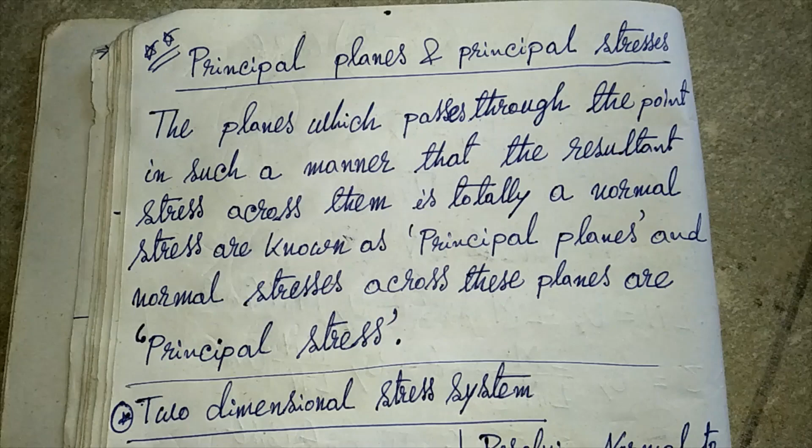In the last video we learned about pure shearing stress, where two mutual stresses are perpendicular to each other.

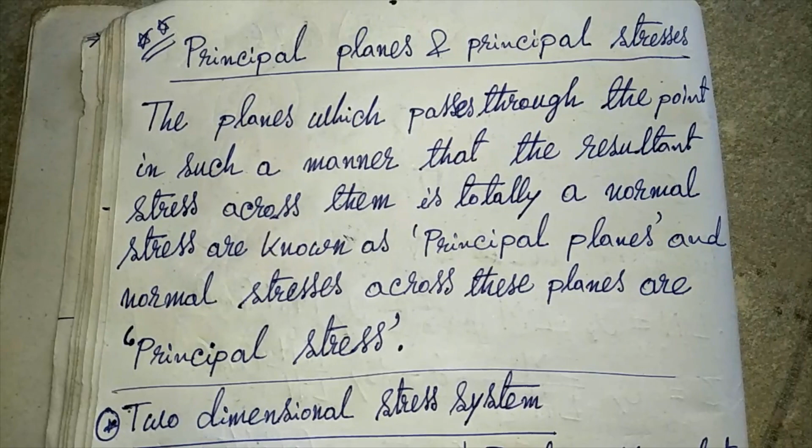In this lecture we will learn about principal planes and principal stresses, and we will find the expressions for major principal stress, minor principal stress, and shear stress.

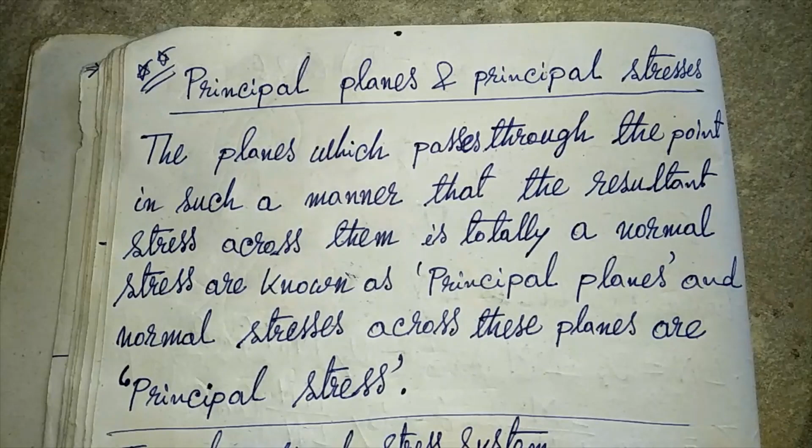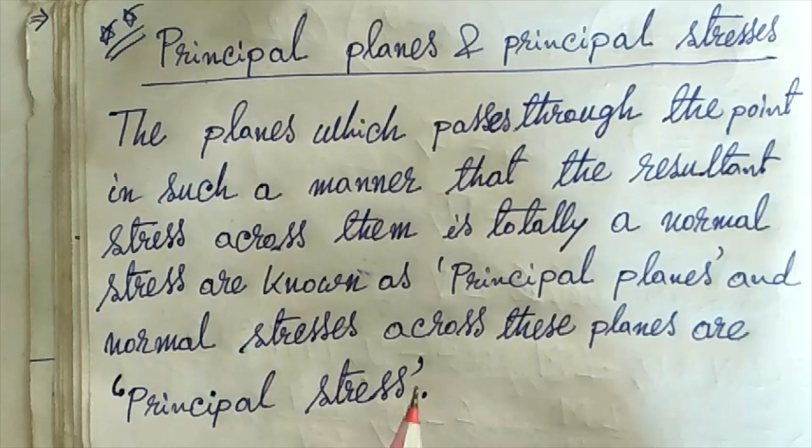Let's start with principal planes and principal stresses. The planes which pass through a point in such a manner that the resultant stress across them is totally a normal stress are known as the principal planes, and the normal stresses across these planes are called the principal stresses.

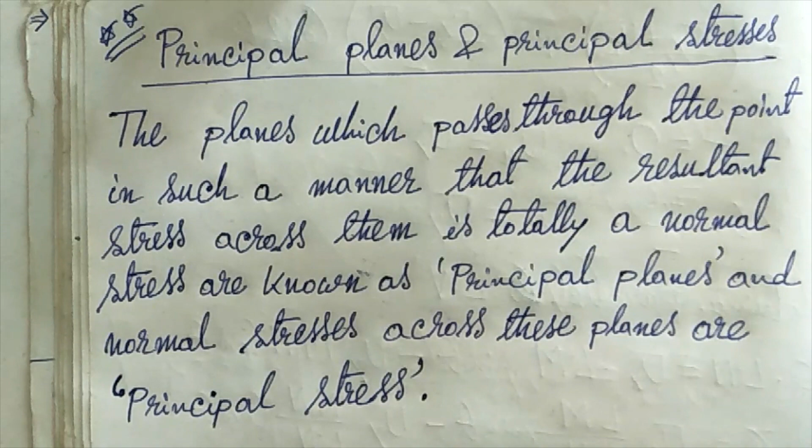Let's see how to derive the principal stress equations. Let's think of a situation where a two-dimensional stress system is involved, meaning both direct stress and shear stress are present.

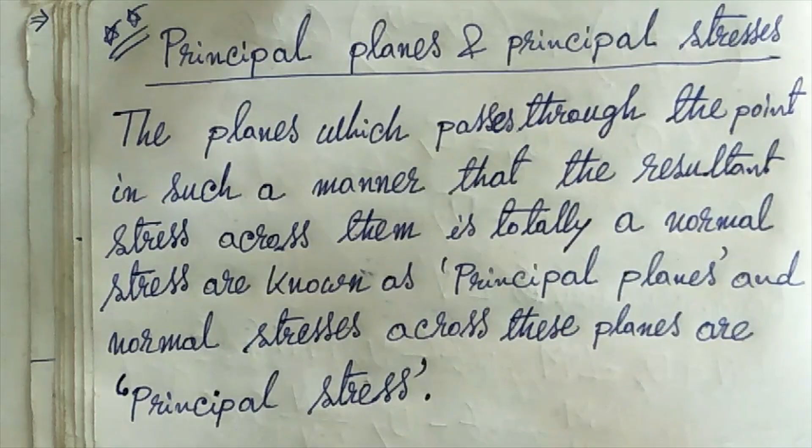Here LMN is a rectangular block, but we are cutting this rectangular block into a triangular section. The plane LN is inclined at an angle theta with the LM side.

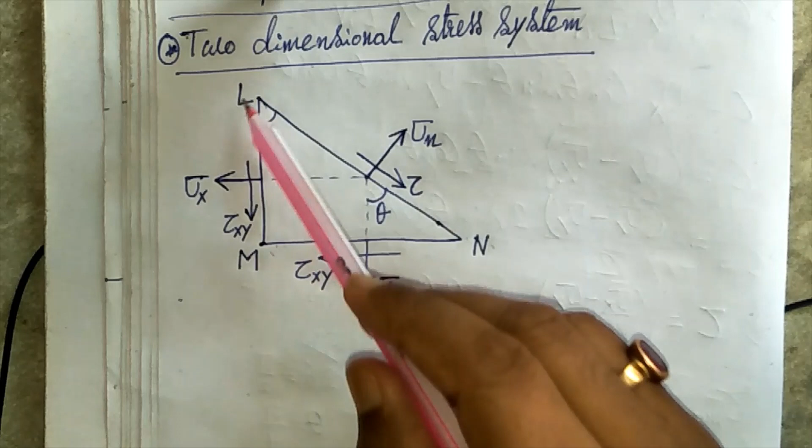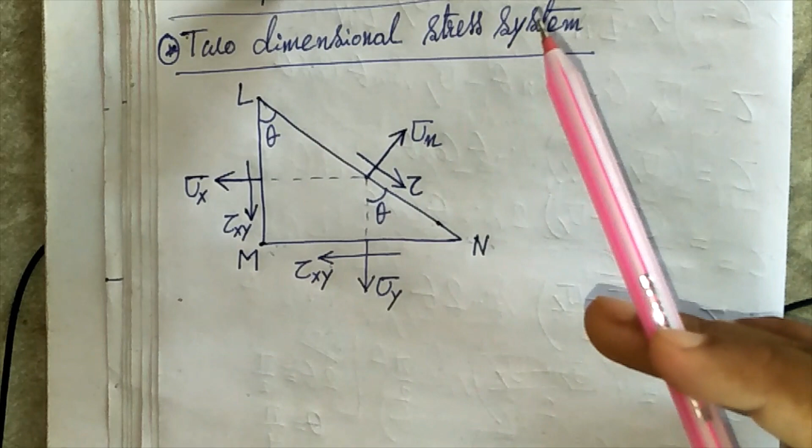The shear stresses acting on LM and MN sides are tau xy. The direct stresses acting on LM and MN sides are sigma x and sigma y. The normal stress along LN is sigma n, and the shear stress along LN is tau. So this is a combination of direct normal stress and shear stress both.

Let's see the expressions for this case. As before, first we resolve all forces which are normal to the LN plane.

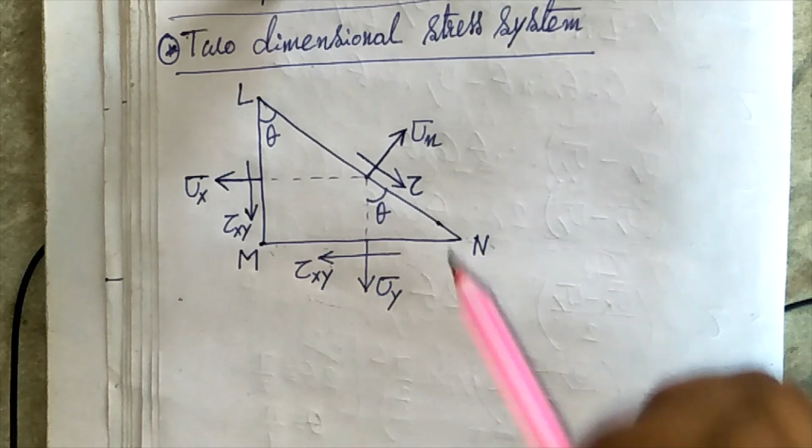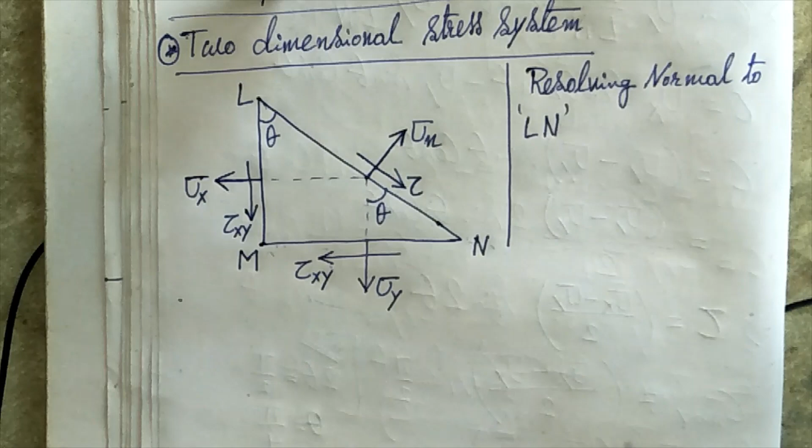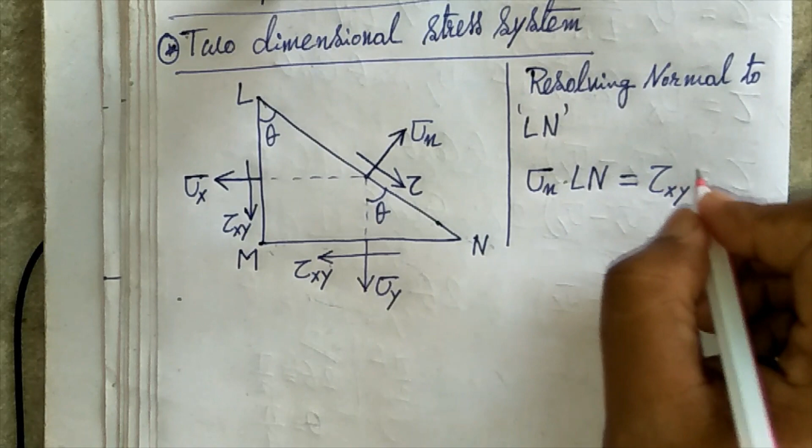Resolving normal to LN: sigma n into LN (with height 1) equals tau xy into LM sin theta, plus sigma x into LM cos theta, plus tau xy into MN cos theta, plus sigma y into MN sin theta.

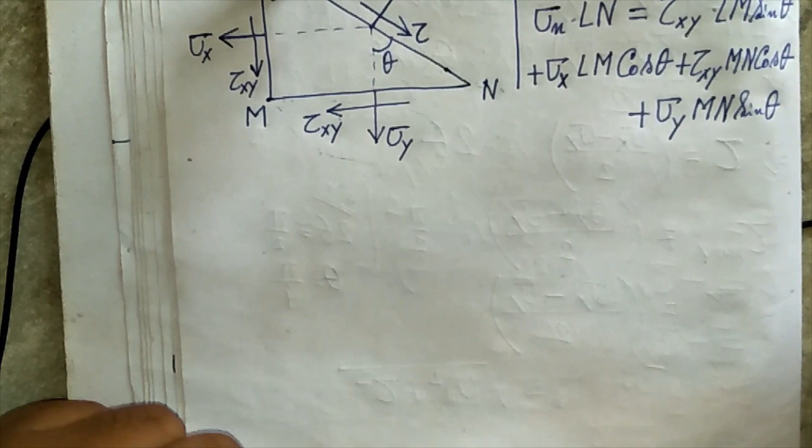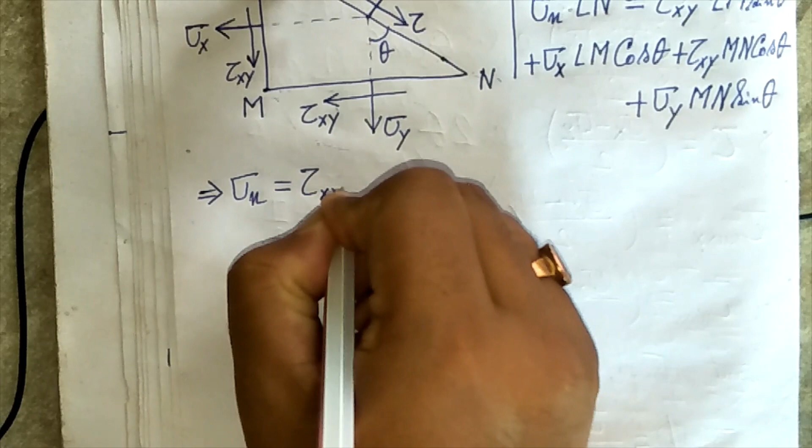This comes from the geometry of the figure, as already described in previous cases. So the value of sigma n equals tau xy times (LM/LN) sin theta plus sigma x times (LM/LN) cos theta plus tau xy times (MN/LN) cos theta plus sigma y times (MN/LN) sin theta.

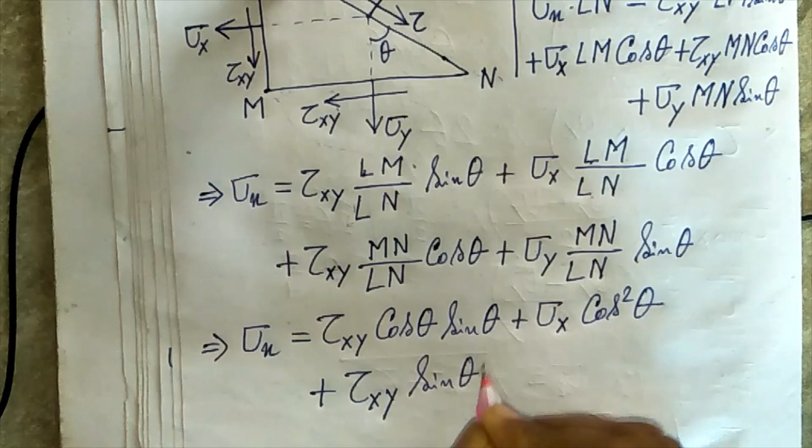Now for the values of LM/LN and MN/LN: from the trigonometry of the figure, LM/LN is cos theta, so tau xy cos theta into sin theta, plus sigma x with cos theta into cos theta giving cos square theta. Similarly, tau xy MN/LN is sin theta, so tau xy sin theta into cos theta, plus sigma y with MN/LN as sin theta into sin theta giving sin square theta.

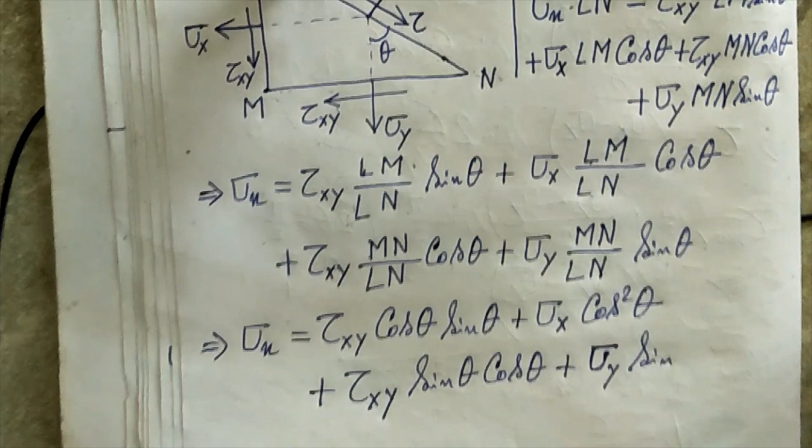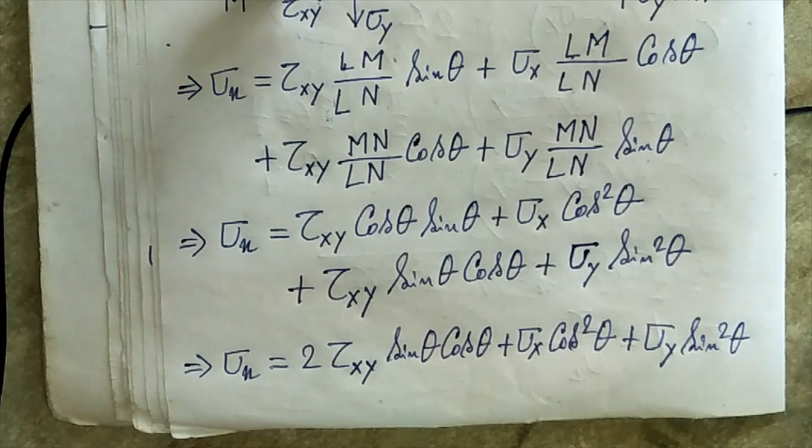So the value of sigma n equals 2 tau xy sin theta cos theta plus sigma x cos square theta plus sigma y sin square theta.

By simplifying the equation of sigma n, we get: tau xy sin 2theta plus (sigma x plus sigma y)/2 plus (sigma x minus sigma y)/2 cos 2theta. This is the expression for sigma n.

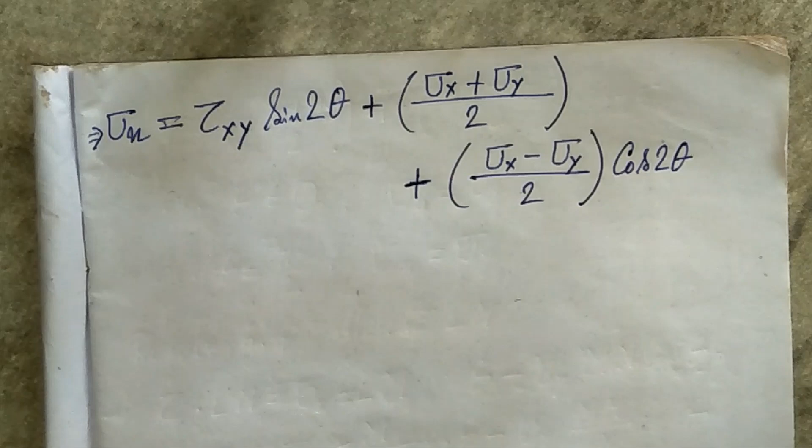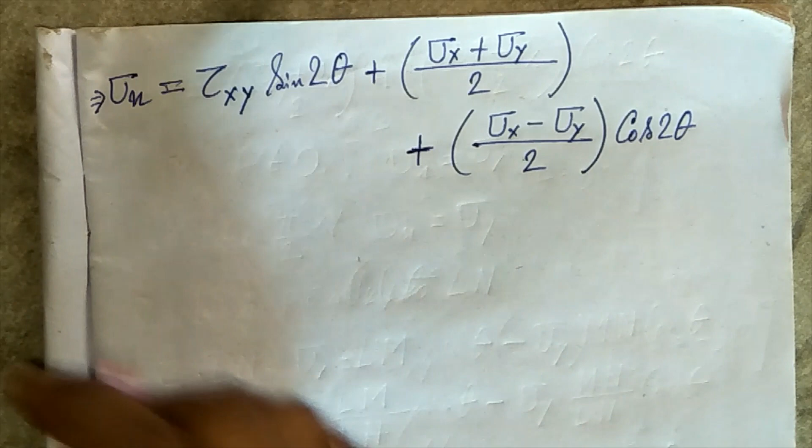Now let's resolve the forces parallel to the LN plane. The parallel stress is the shear stress, so tau is the shear stress along LN. Tau into LN equals tau xy into MN sin theta...

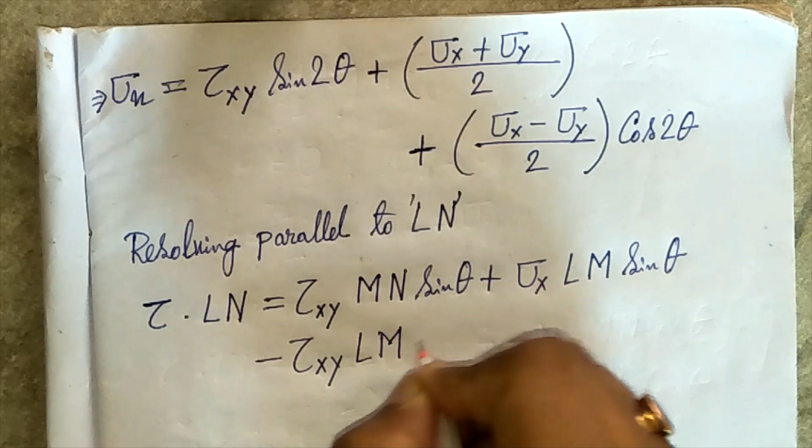...plus sigma x into LM sin theta, minus tau xy into LM cos theta, minus sigma y into MN cos theta.

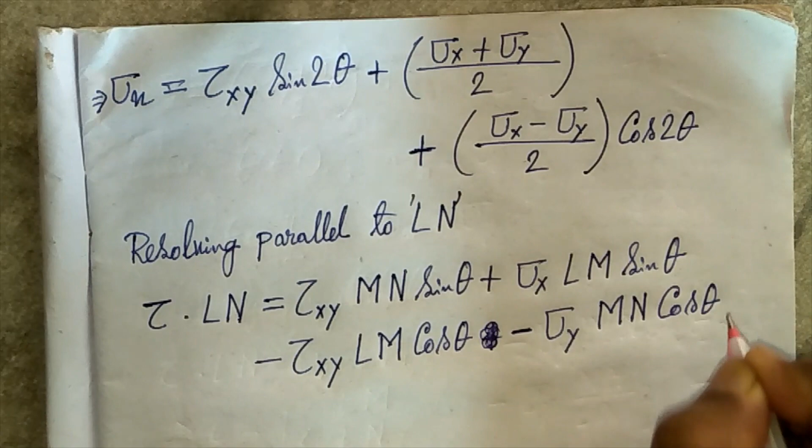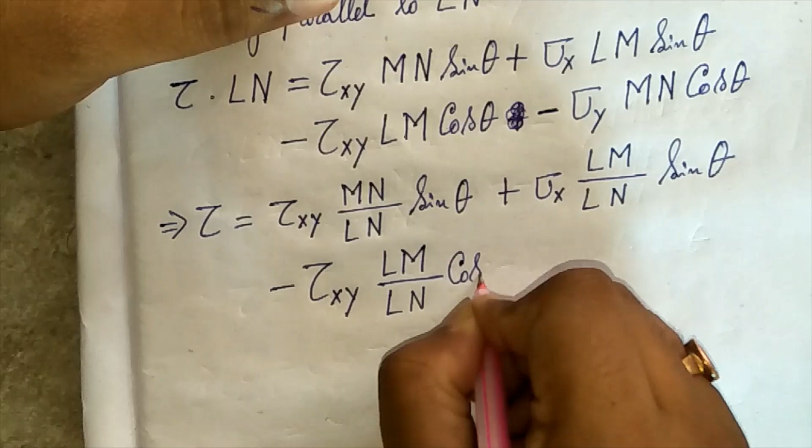So we can write tau equals tau xy times (MN/LN) sin theta plus sigma x times (LM/LN) sin theta minus tau xy times (LM/LN) cos theta minus sigma y times (MN/LN) cos theta. So this is the expression.

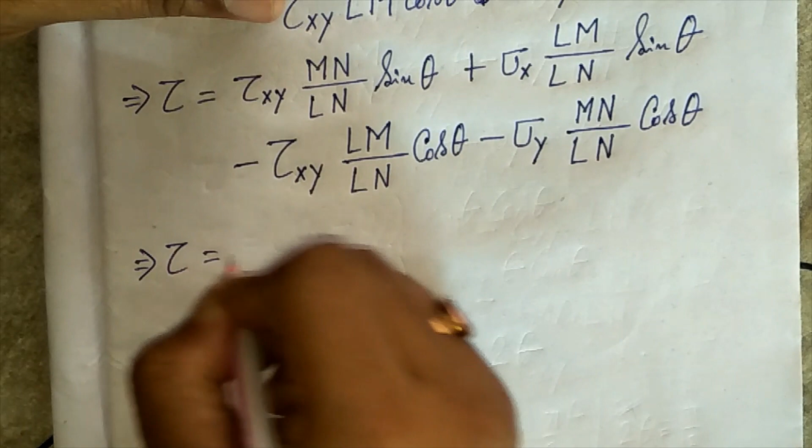So from the geometry of the block, we can write tau equals to tau xy. This mn by ln is sin theta, so we can write tau xy sin square theta plus this lm by ln is cos theta, so we can write sigma x into cos theta sin theta, minus again this lm by ln is cos theta, so tau xy cos square theta, minus this mn by ln is sin theta, so sigma y sin theta cos theta.

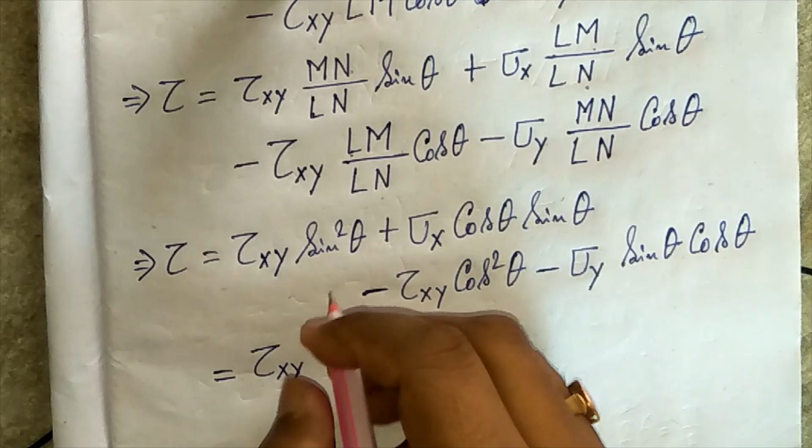So by simplifying, we can write tau xy sin square theta minus cos square theta, plus sigma x minus sigma y by 2 into sin 2 theta, or we can write

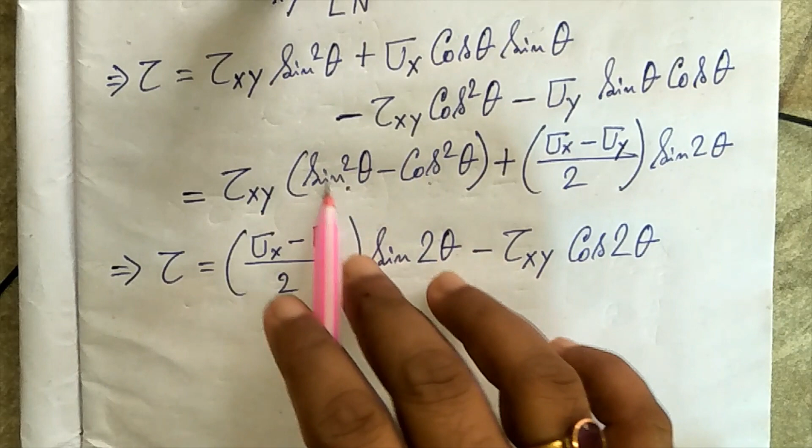tau equals to sigma x minus sigma y by 2 sin 2 theta, minus tau xy cos 2 theta. This is sin square theta minus cos square theta, but the formula is cos square theta minus sin square theta, so that becomes minus cos 2 theta. So simply we can write minus tau xy cos 2 theta. So this is the expression of shear stress tau.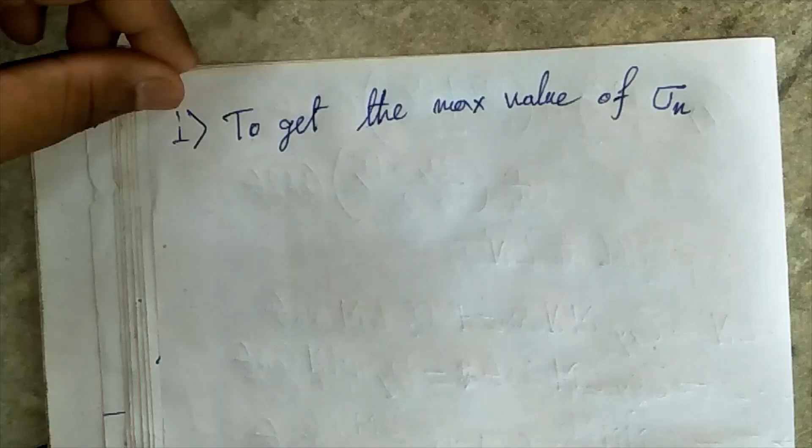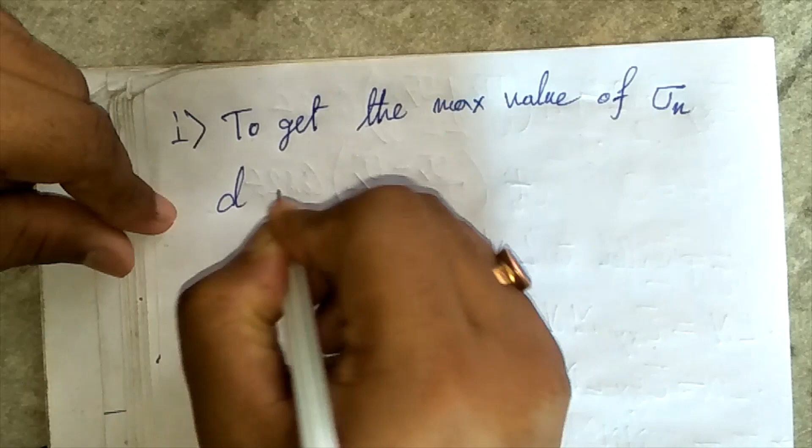Now in order to find out the maximum and minimum values of sigma n and tau, let's see. So first of all, to get the maximum value of sigma n, we have to differentiate the sigma n expression with respect to theta. So d sigma n by d theta, we are going to differentiate the expression of sigma n with respect to theta.

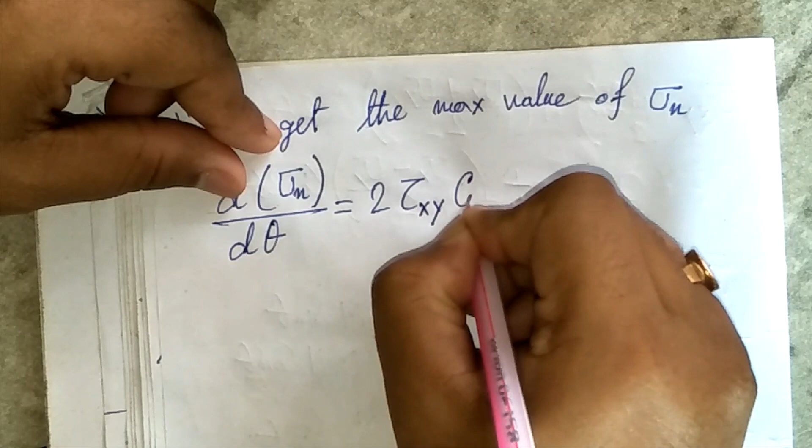Let's see what we get. That is 2 tau xy cos 2 theta minus 2 sigma x minus sigma y, this is sigma y, by 2 into sin 2 theta.

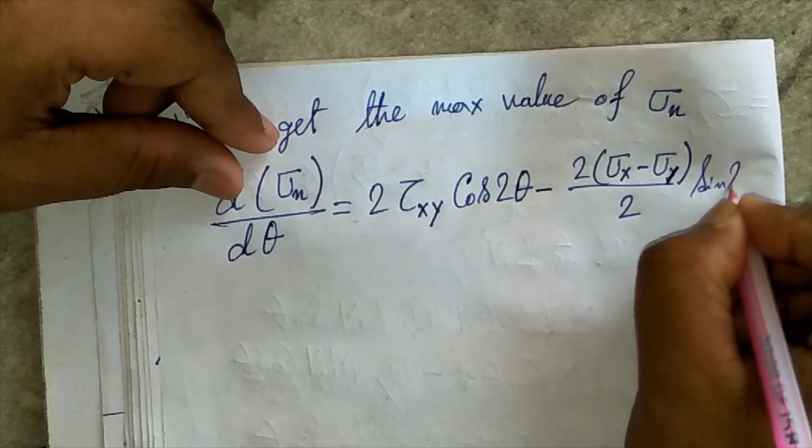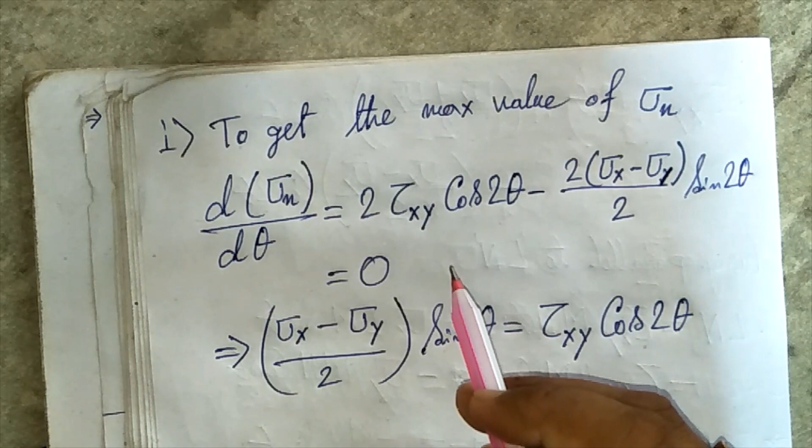So by equating this expression to 0, let's see what we get. We get sigma x minus sigma y by 2 into sin 2 theta is equals to tau xy cos 2 theta. So to find out the maximum value of sigma n, we have to equate the derivative of sigma n with respect to d theta to 0.

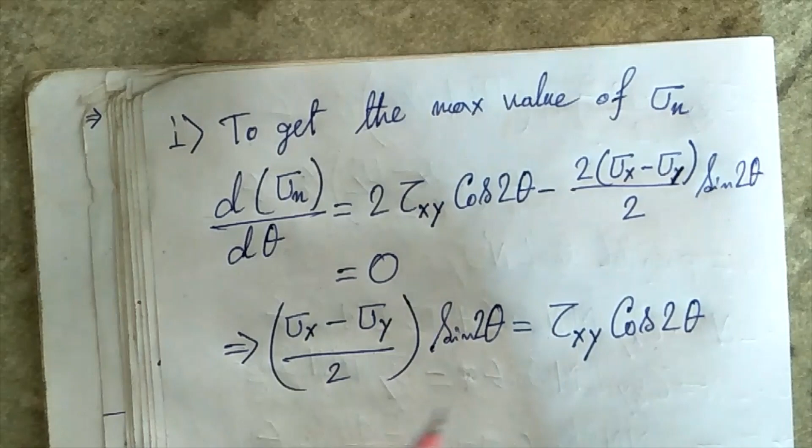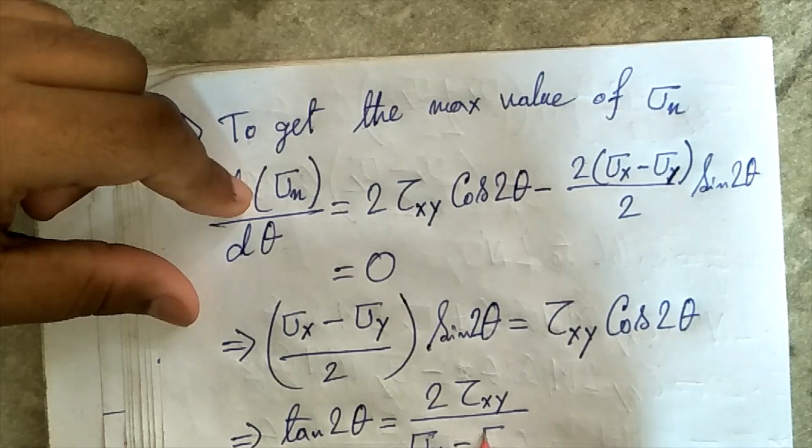So we get this expression, or we can write tan 2 theta is equals to 2 tau xy by sigma x minus sigma y. So this is the maximum value for 2 theta, or

it follows that for any particular system, the principal stresses may be calculated by considering the planes which carry the zero shearing stresses.

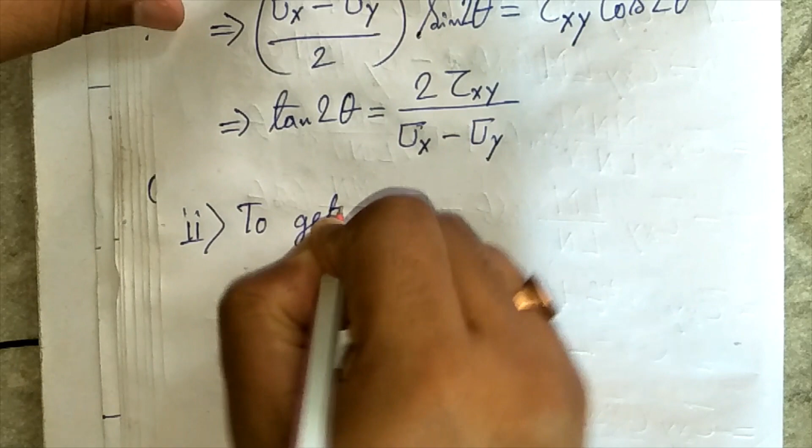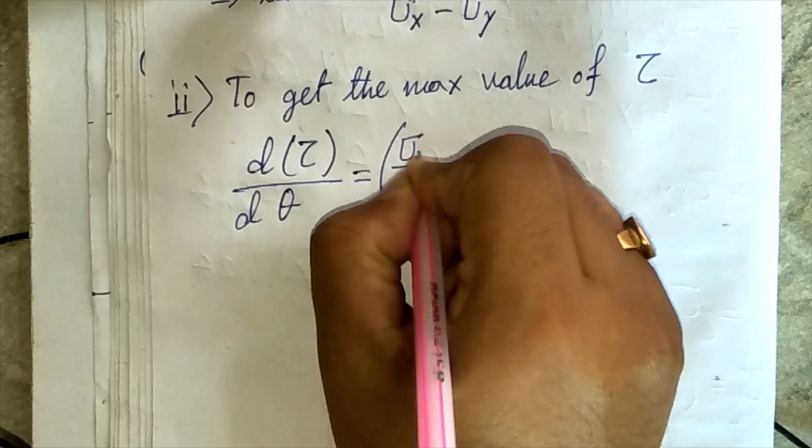Now, to get the maximum value of tau, we have to differentiate the tau with respect to theta. So the tau expression becomes sigma x minus sigma y by 2 into 2 cos 2 theta, plus tau xy sin 2 theta, 2 tau xy sin 2 theta.

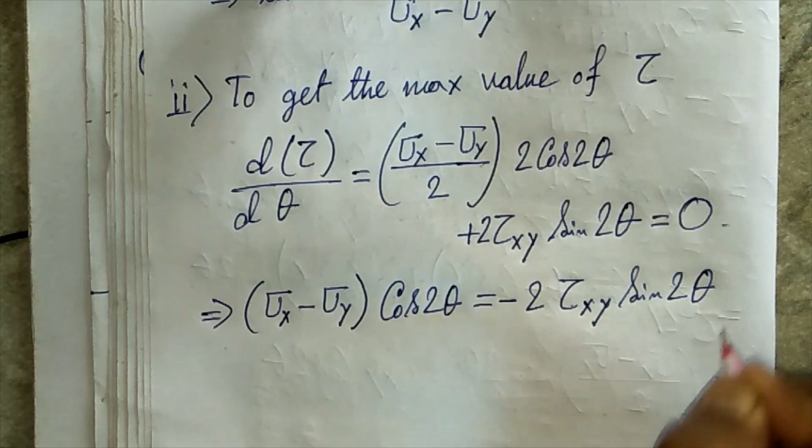And now we have to equate this thing to 0. So let's see what we get. That becomes sigma x minus sigma y into cos 2 theta, that is equals to minus 2 tau xy sin 2 theta. So by solving the previous equation, we get tan 2 theta equals to minus sigma x minus sigma y by 2 tau xy.

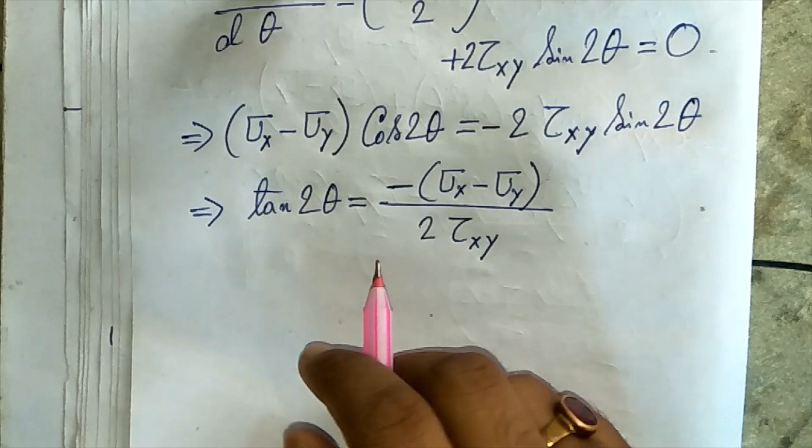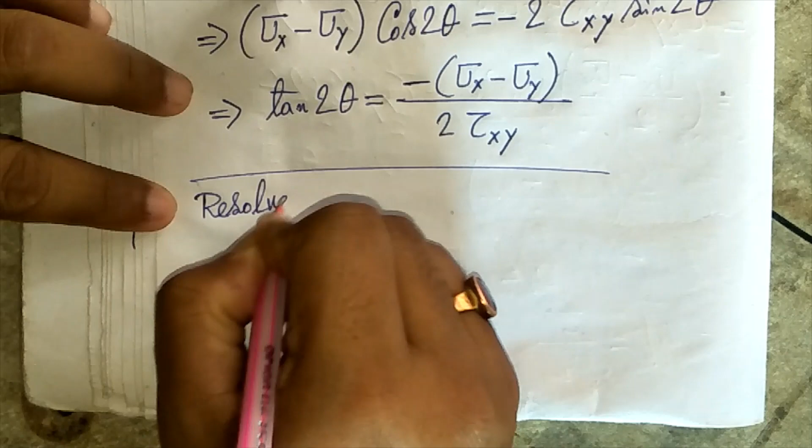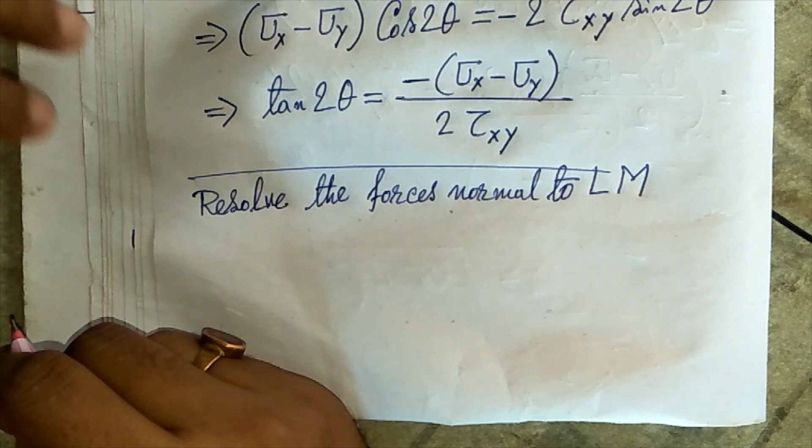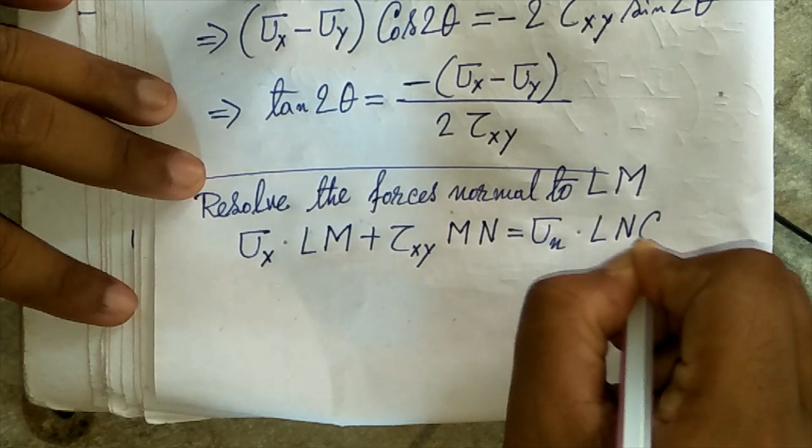Now let's resolve the forces normal to LM. This comes from the previous figure, the triangle figure. So by resolving the forces normal to LM, we get sigma x into LM plus tau xy into MN is equals to sigma n into LN cos theta. This comes from the geometry, basic geometry.

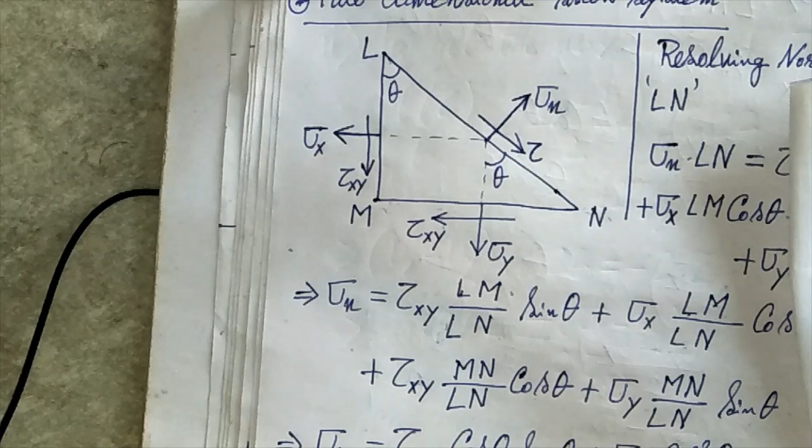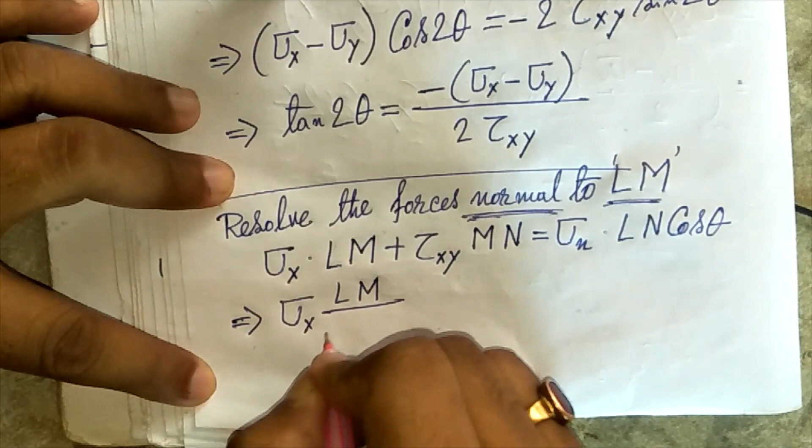Now we are going to resolve the forces normal to LM. LM is the this is LM. We are going to resolve the forces normal to LM, and then we will resolve the forces parallel to LM. So by dividing this, we get sigma x into LM by ln plus tau xy Mn by ln is equals to sigma n cos theta.

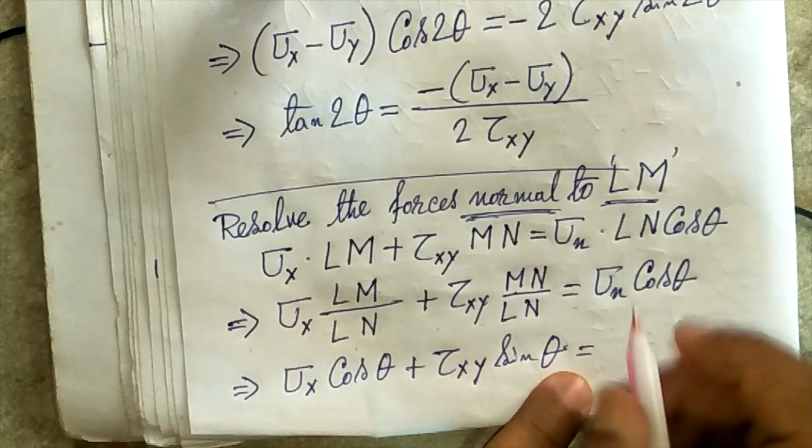Now the value of Lm by ln is cos theta, and the value of Mn by ln is sin theta. So we can write sigma x cos theta plus tau xy sin theta is equals to sigma n cos theta. So we can write sigma x plus tau xy into tan theta equals to sigma n.

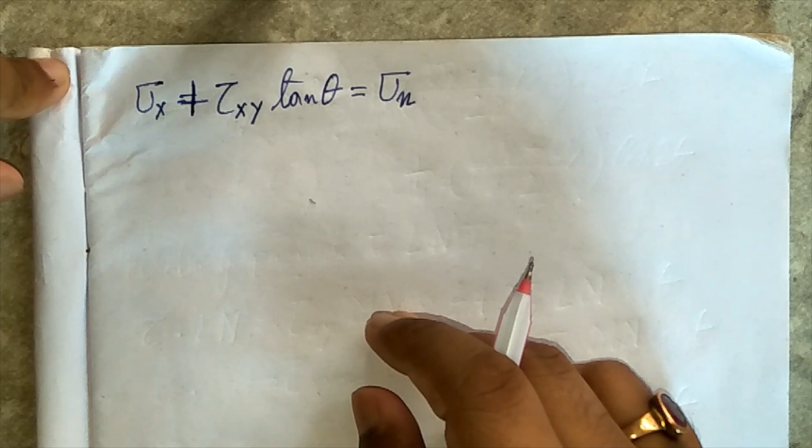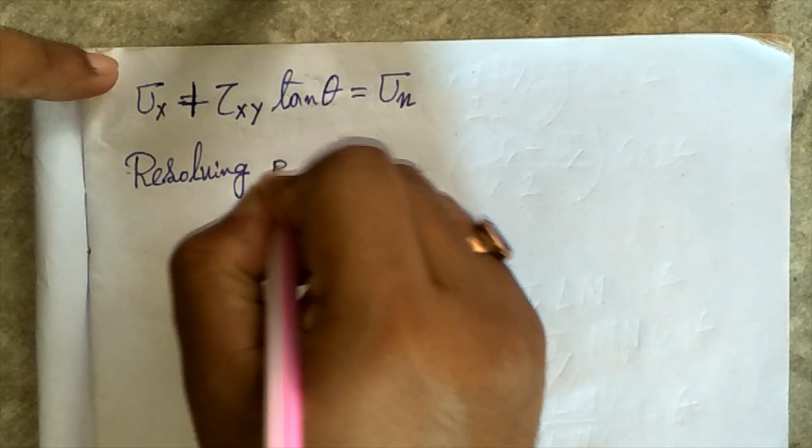Now we are going to resolve parallel to LM. So resolving parallel to LM, we get sigma y into Mn plus tau xy into Lm is equals to sigma n into ln sin theta.

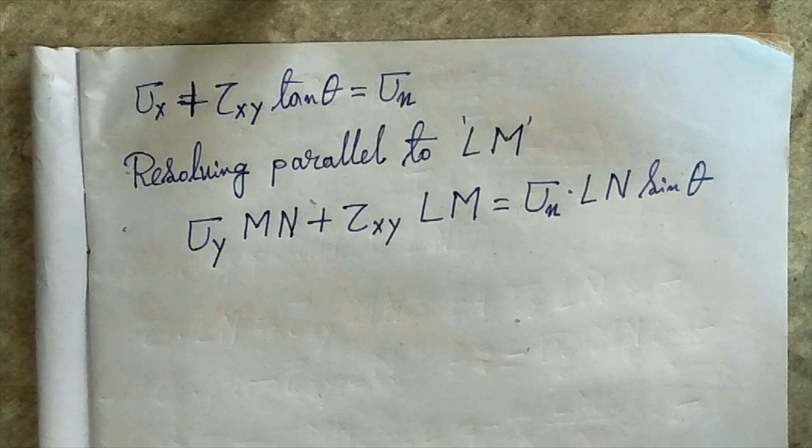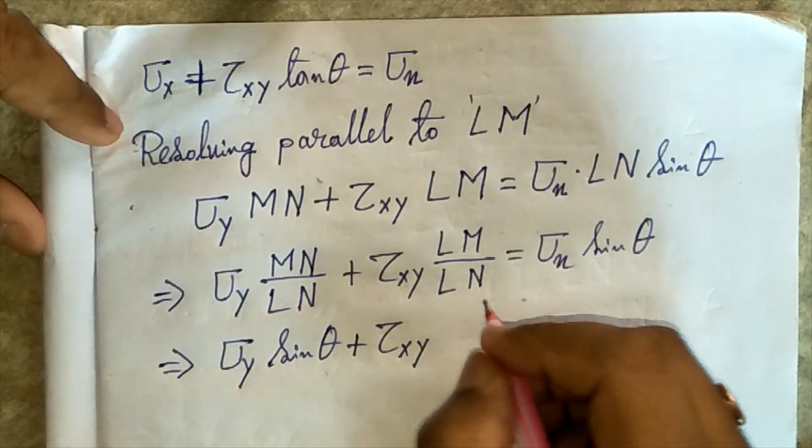Okay, so now dividing both sides by ln, we get sigma y into Mn by ln plus tau xy into Lm by ln equals to sigma n sin theta, that is sigma y sin theta plus tau xy cos theta, sigma y sin theta plus tau xy cos theta is equals to sigma n sin theta.

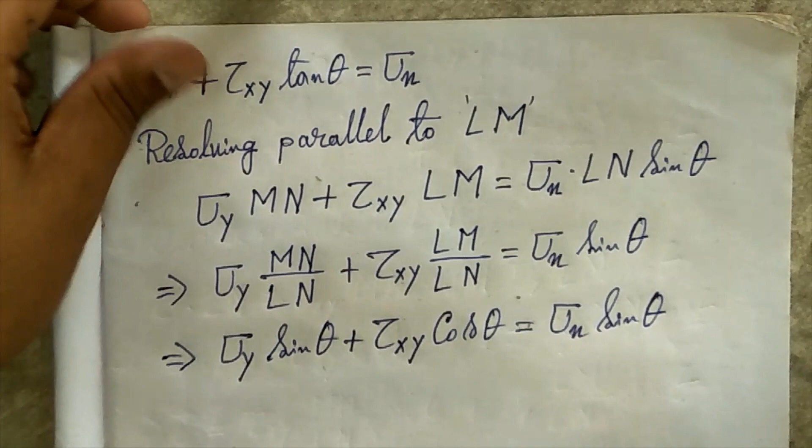So we can write sigma y plus tau xy cot theta equals to sigma n. Okay, now from this expression we can write the tau.

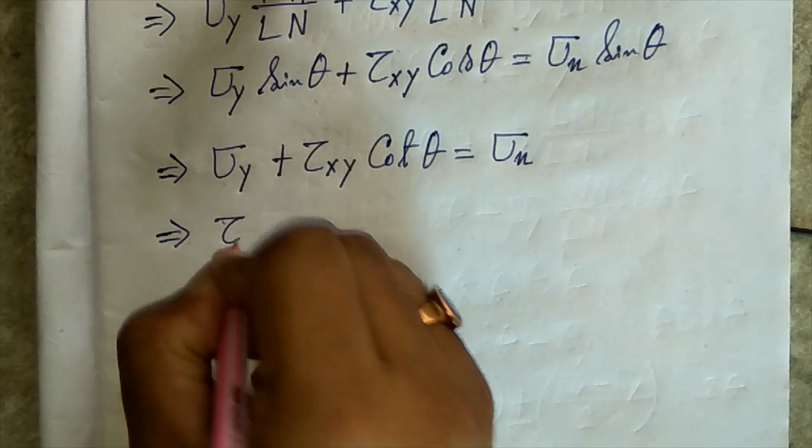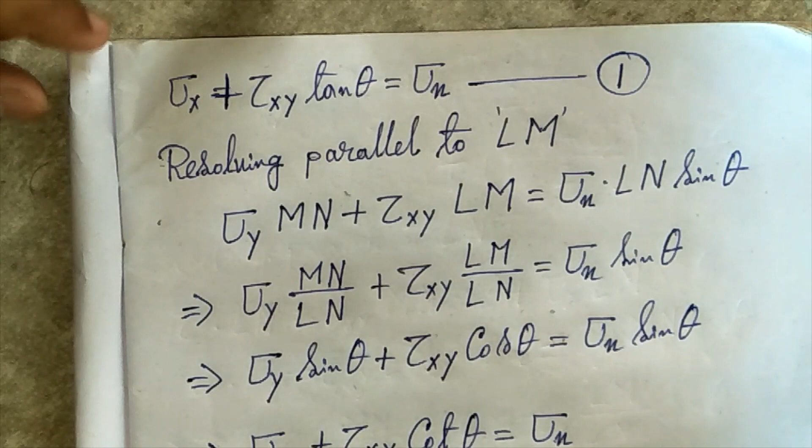From the previous expression, that means from this expression, we know that tau xy tan theta is equals to sigma n minus sigma x. And from this expression we find that tau xy cot theta is equals to sigma n minus sigma y.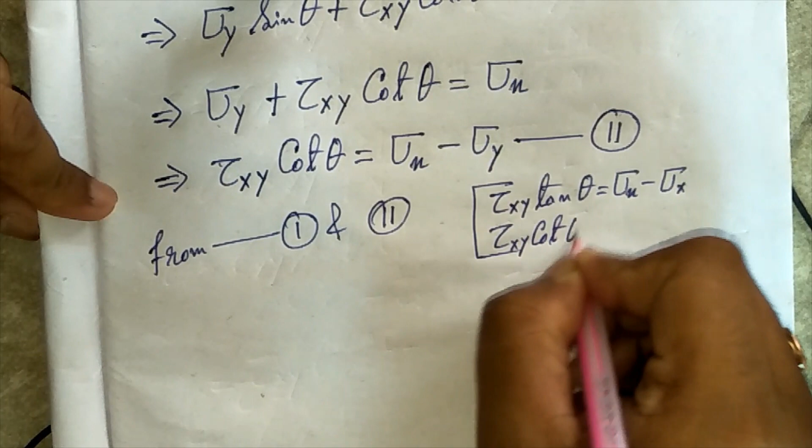This is expression number 2. So from these two equations, from 1 and 2, that means tau xy tan theta is equals to sigma n minus sigma x, and tau xy cot theta is equals to sigma n minus sigma y. From these two relations, let's see what we get.

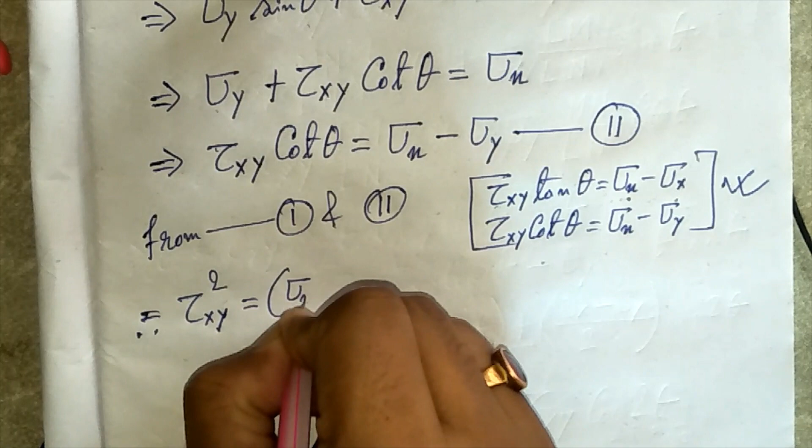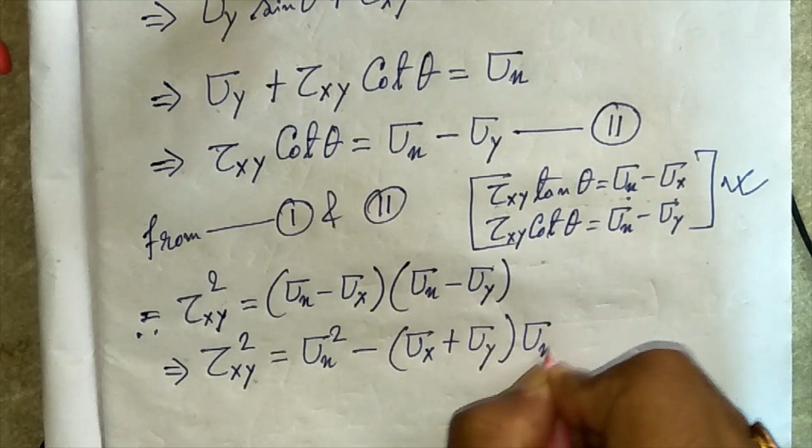So from these two relations we can write tau xy square. By multiplying these two equations we can write tau xy square is equals to sigma n minus sigma x into sigma n minus sigma y. So we can write tau xy square is equals to sigma n square minus sigma x plus sigma y into sigma n plus sigma x sigma y.

So now it's a second order equation, a quadratic equation. By solving this equation for sigma n, we can find out the value of sigma n. Okay, so now by solving this second order equation, we can write the value of sigma n.

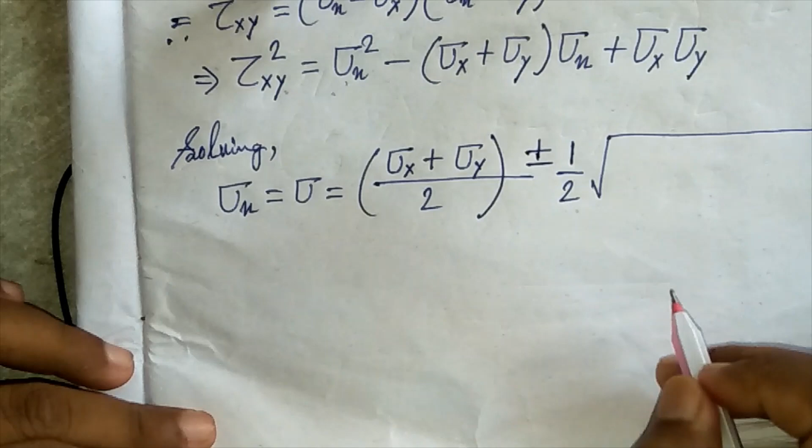The value of sigma n, or simply sigma, is equals to sigma x plus sigma y by 2 plus minus half of root over sigma x plus sigma y square minus 4 into sigma x sigma y minus tau xy square.

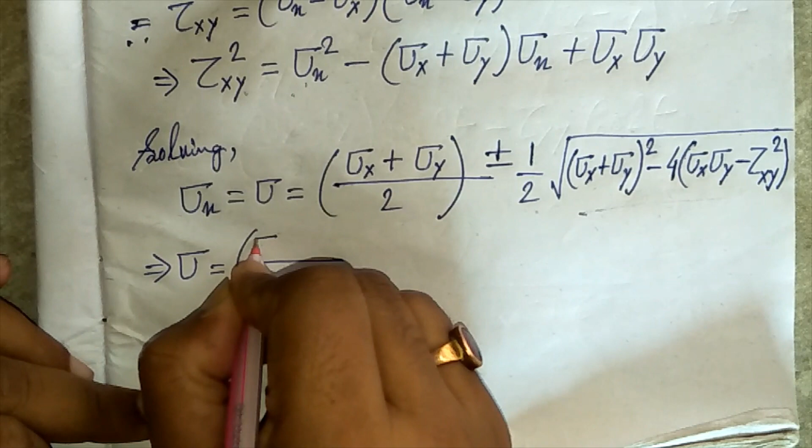So this is the expression of sigma n, or from this value we can write sigma equals to sigma x plus sigma y by 2 plus minus half of root over sigma x minus sigma y whole square plus 4 tau xy square.

We can write by simplifying this above equation in this form. So from this equation there is a concept that comes into picture, that is major principal stress and minor principal stress.

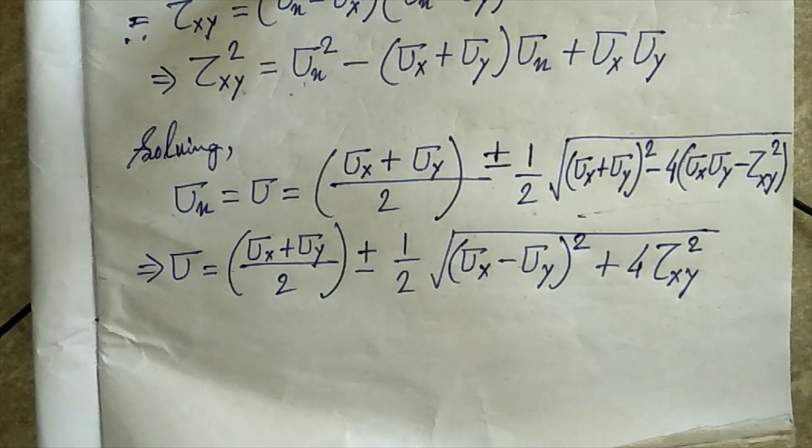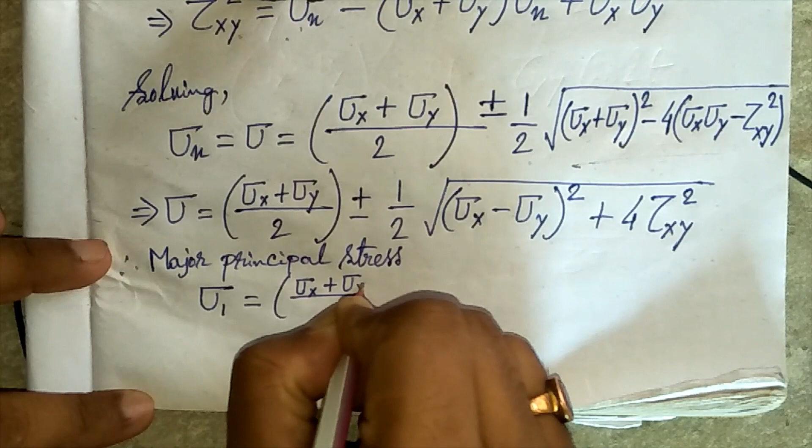So the value of major principal stress, that is sigma 1, is equals to sigma x plus sigma y by 2 plus half of root over sigma x minus sigma y square plus 4 tau xy square. This is the major principal stress value.

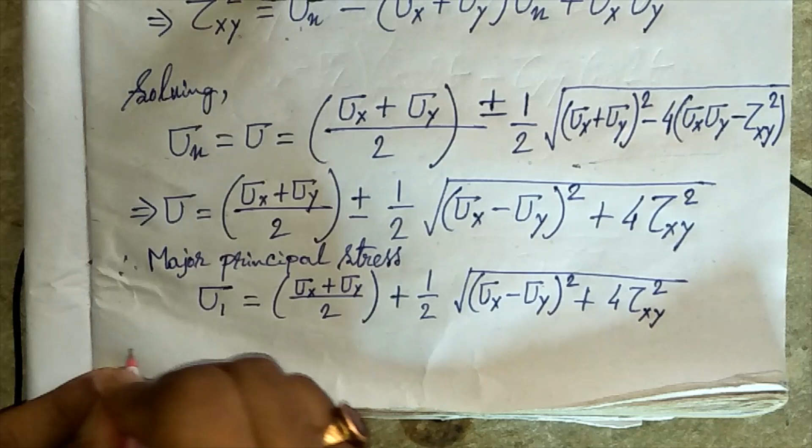Okay, now the minor principal stress value is sigma 2. Sigma 2 is nothing but sigma x plus sigma y by 2 minus half of root over sigma x minus sigma y square plus 4 tau xy square. So this is the expression for sigma 2.

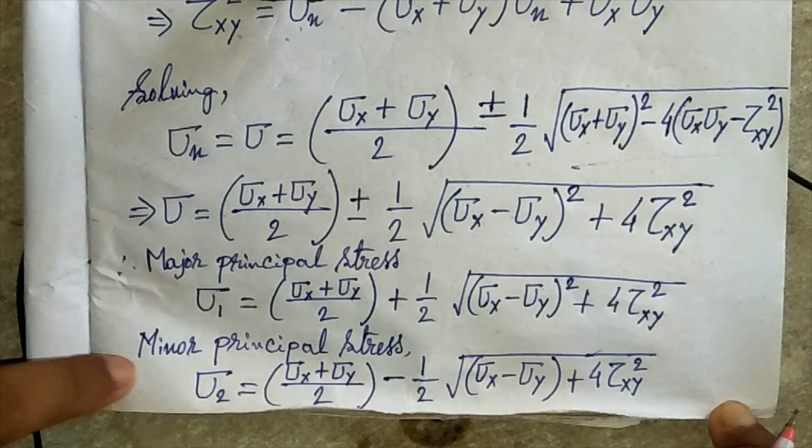This is the major principal stress and this is the minor principal stress. We can write the major and minor principal stress expressions in this fashion: sigma x plus sigma y by 2 plus root over sigma x minus sigma y by 2 plus tau xy square, or sigma x plus sigma y by 2 minus root over sigma x minus sigma y by 2 plus tau xy square. So this is the expression for major and minor principal stresses.

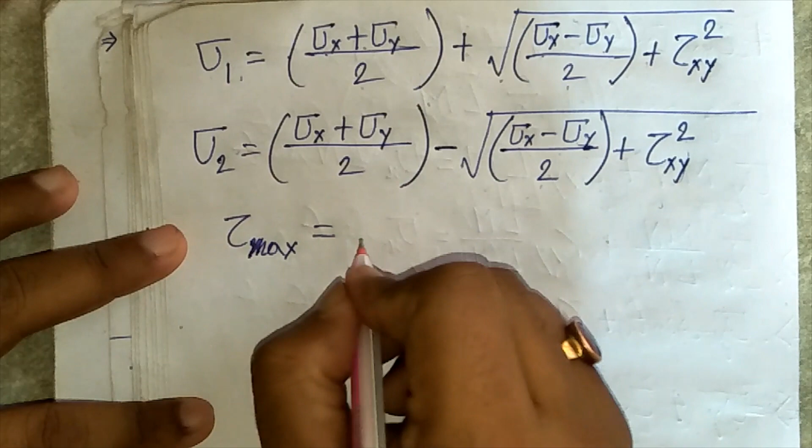Now the maximum shear stress, the value of tau max, is the major principal stress sigma 1 minus the minor principal stress, divided by 2. This is the maximum shear stress value, or we can write tan 2 theta is equals to 2 tau xy divided by sigma x minus sigma y.

Okay, so another important thing that I want to comment on: the sum of the major principal stress and the minor principal stress is equals to sigma x plus sigma y.

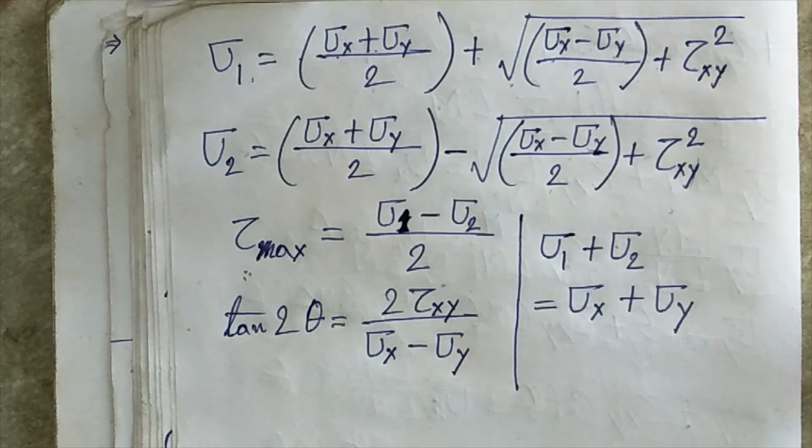So in this lecture we have learned about direct stresses, pure shear stress, direct stresses which are perpendicular to each other, and the principal stresses, and we have derived the different expressions for major principal stress, minor principal stress, and maximum shear stress, etc. In the next lecture we will learn about the Mohr's circle, how to draw the Mohr's circle, and related things. Okay, thank you.